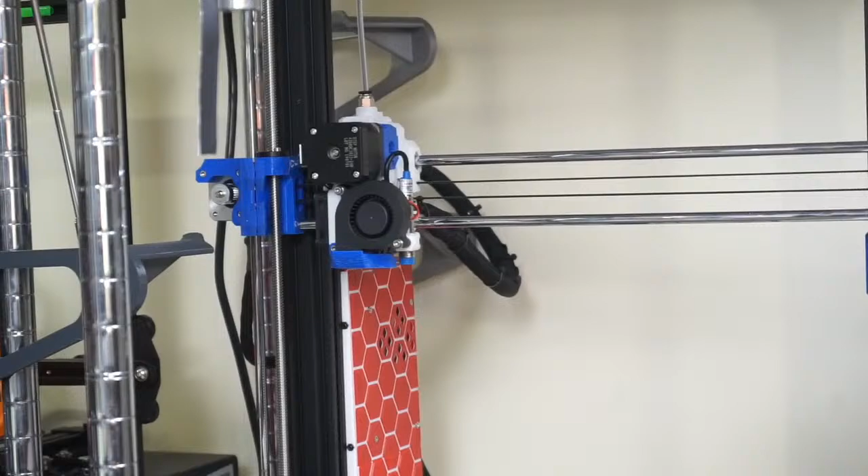If you go to Aaron's Cults page for Ultra Magnus, you'll find the files for that. You can also just search the bare extruder and you should be able to find it easily enough.

Notepad++ is almost done. My goodness, their servers are slow.

No worries, Gabriel. I did several videos on assembling the Ultra Magnus, so if you want to go back and check those out, I go through most of the build as I was building it, so feel free to check that out.

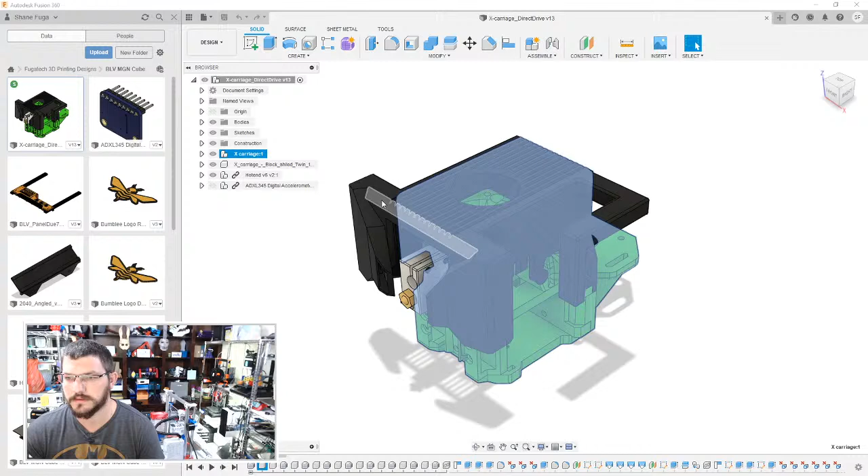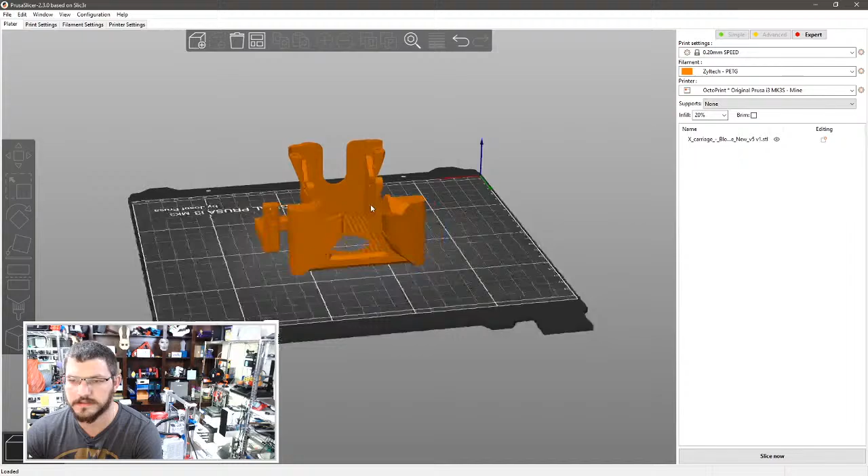So let's save as STL, just on the desktop for now. And then go to here, delete that, pull this in, put on the face there. So this is how this prints - no supports or anything. But I do have also the new attachment point right here.

That is for the accelerometer, which, oh man, my wife moved that, didn't she? I gotta find where that went. But yeah, other than that, this should be pretty good to go.

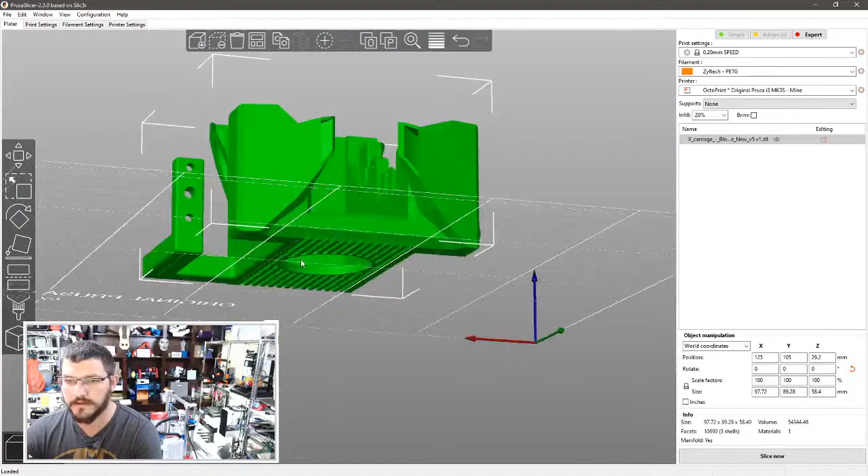We're gonna do quality on this. Slice it up. And yeah, 5.5 hours, easy enough.

Hey, it's finished, good deal. So now I think we just need to reboot it, right? Yep, we're going to reboot this.

Well, Mike, in the U.S., you can buy, I mean, hundreds of brands. Brand is not really a problem. But I think that also would be kind of to the person printing, you know - I want ABS, I want this, I want PETG, these colors, you know.

Let's restart, see if we're back up yet. All right, we're back up. Sweet. And if we go here, refresh here.

Oh, that's not it. So we need to do prime.local. There it is.

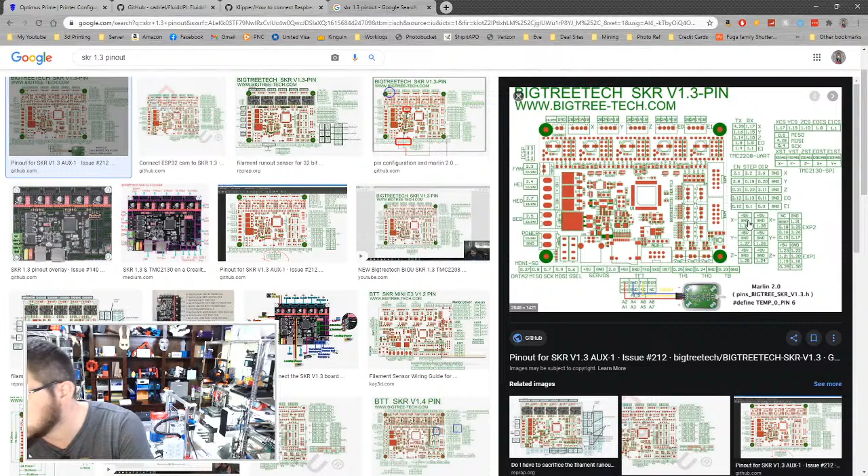That's in there multiple times. That's why, 1.28. That's what it says though. Let's try 1.28. Wait for it to connect. Come on, restart firmware. Still not connecting.

Restart Klipper. Come on, connect. I have this set in here as AMA 0, as it should be. Why isn't this just working here? So let's, I'm going to try to just hit the reset on the board, see if that kickstarts it.

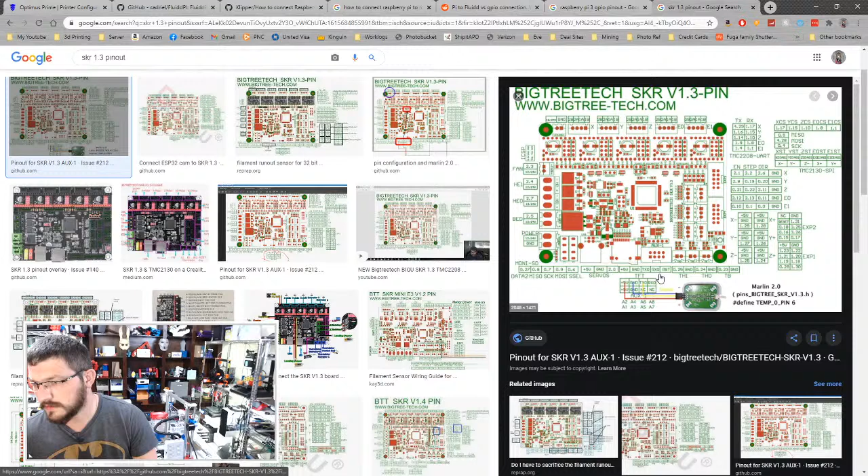Hey Adam, yeah, I'm pretty sure I tried both ways. I just flipped it around twice. So it's ground, TX, and then RX, and then on the SKR it is, the TFT is, yeah.

I think I do have it wired wrong. Now I'm looking at it here. I have it upside down. So it's receive, transmit, ground.

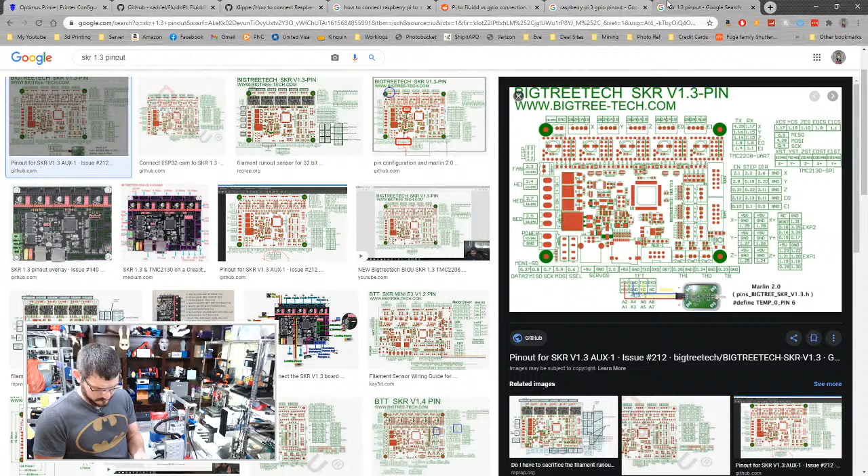Hey, Baloo, how you doing? Good morning.

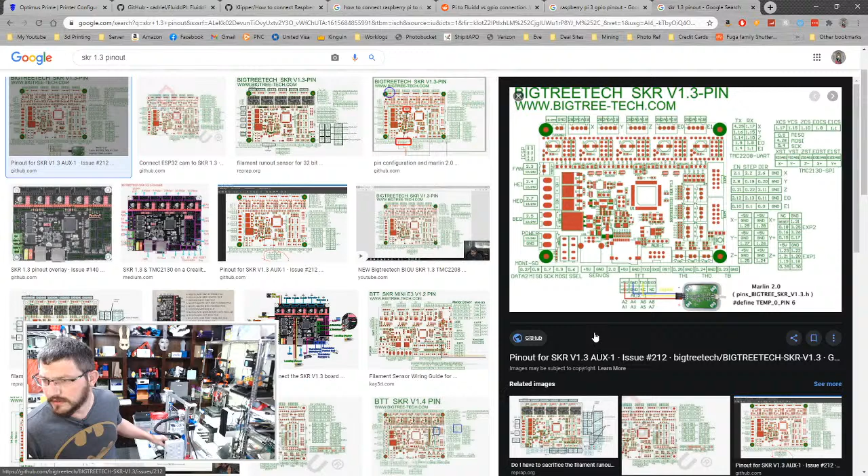So ground is, no, that's right. Ground, transmit, receive. So transmit is red, and the receive is the third pin. So, ground.

So if we flip this to here: ground, transmit, receive. Where are we going? Ground, receive, transmit. Ground is brown, that's right. Transmit is the second one on the bottom there, right? Yep, transmit's going to the receive, which is there. Yeah, that's all hooked up right.

Let's give it another reboot, see what happens here. 35 centigrade and melting. Oh man. I know that feeling.

Mike, yes, I did do the disable the console. I might go in and do it again, but I did that when I did the Raspi config.

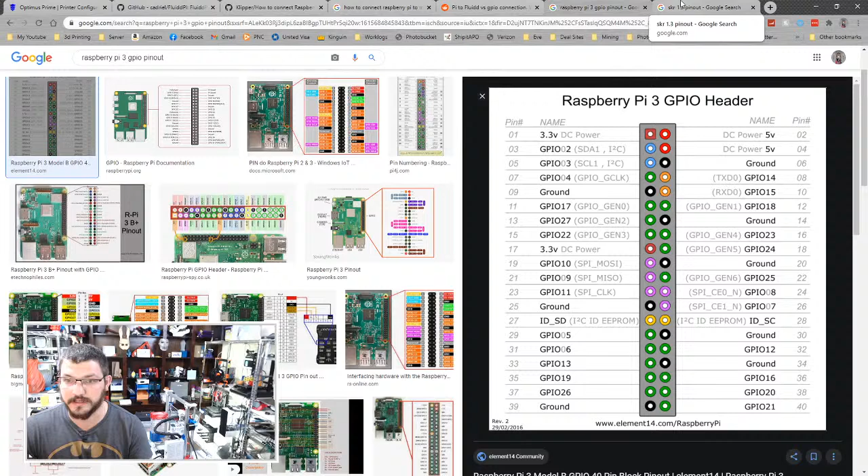Unless for some reason it's not updating the firmware. The only thing I can think of is if it didn't grab that, which we can look at real quick. That doesn't hurt anything. So as long as this says .CUR, we're okay. Yeah, firmware .CUR. So the firmware did take on the board.

So I'll run through that one more time. Interface options, serial options, and that is going to be a no, and then a yes, which it already was. Finish. Reboot. I'm going to reboot it one more time.

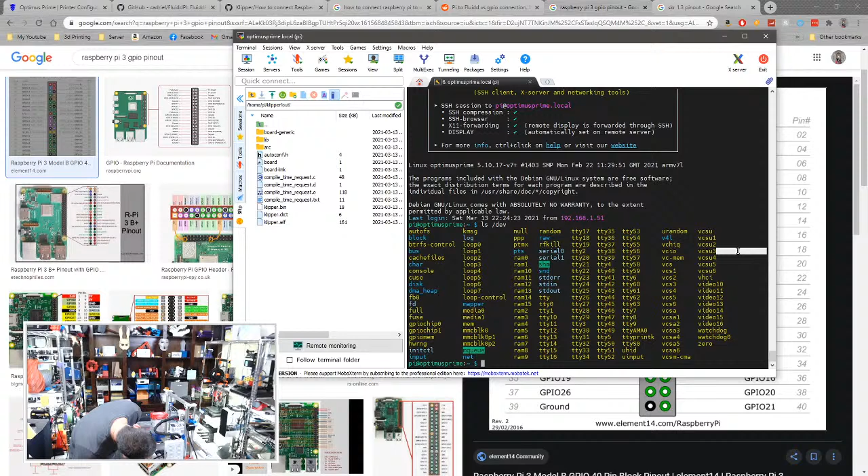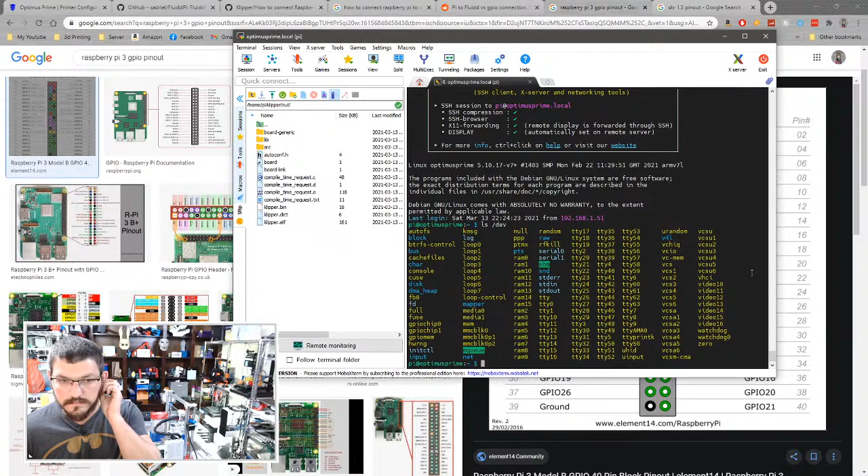Yeah, it's in there. Alright, let me get a new set of jumpers out, which I actually have another set right here that I can use.

Let's turn this off. And we're going to make white the ground. So to confirm, okay, so that is ground, transmit, receive. And this is ground, transmit, receive. So we're going to flip these two over.

Adam, I just like to keep you on your toes. That's what it comes down to.